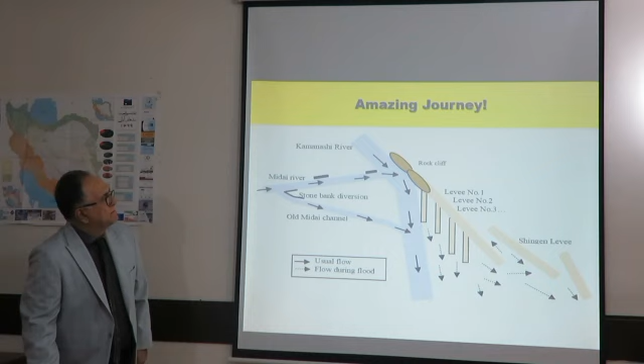hydraulic structures of Thailand, and water management in Malaysia, and Japan, still Japan, and this is Kafara Dam, 4,600 years old in Egypt, aqueduct in Italy, Cavour Canal in Italy on 4 rivers, water management in Bali, and it was really an amazing journey.

I should like to present the 17 papers. This is the first chapter on sustainable development and water resources from Dr. Bagheri and his lecturer from Sweden on general concept of water resources sustainability.

Then we have a paper on sustainability of Chinese civilization and water conservation. Engineer Charles Abernethy has prepared magnificent papers on roles of management in sustainability of irrigation system. And we have another chapter on history of irrigation in Thailand and its sustainability.

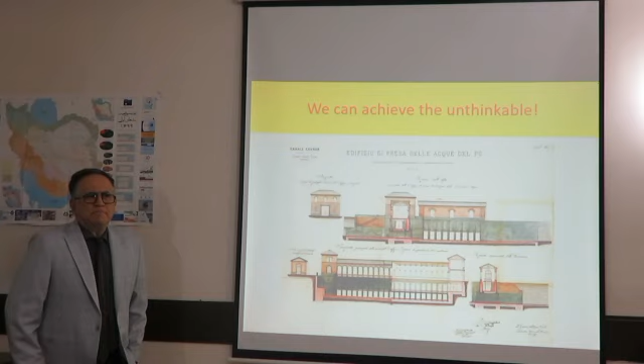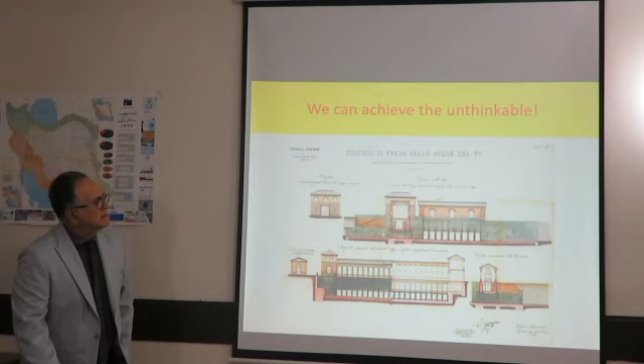And another reason is that we can achieve the unthinkable. This is the Cavour Canal in Italy. As I mentioned, an 83-kilometer long canal with 100 bridges and 200 siphons and 60 flumes, and it was constructed in 3 years, 160 years ago.

This is the Kurit Dam in Iran. It was constructed 650 years ago, and it was the highest dam in the world for more than 500 years. And they achieved this. It is located at the edge of a desert in Iran. And it is another masterpiece of water engineering in Iran.

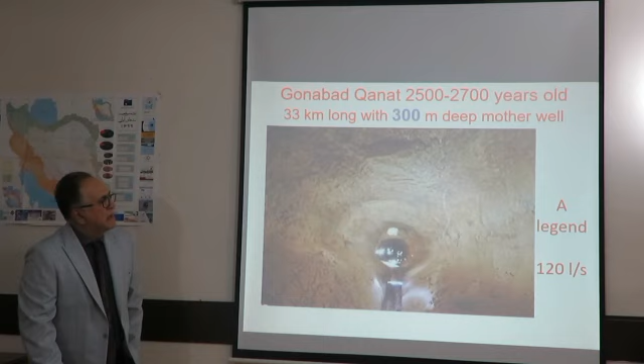It is Gonabad qanat, 2,500 to 2,700 years old. It is 33 kilometers long, and the mother well is 300 meters deep. And still it is working. It's a legend among the Iranian qanats. Okay, we can achieve the unthinkable, but it takes vision, collective action, audacity, fortitude, and adapting to the local conditions.

Another point is, I mentioned government, people, and engineers are pillars of sustainability. And the time steps of politicians are rather short compared to the time steps of engineers. But the public can help achieve the synergy, a combination of water engineers and politicians.

In the 1848 Constitution, the kings of the Netherlands were forbidden from interfering in the technical aspects of projects. I think it was a very important step in achieving sustainability in many projects. I mentioned Kurit Dam, and they constructed a new dam just upstream of the old dam, and it is empty. It was motivated by political agendas, and sometimes large capitals of government can be an opportunity or threat for sustainability of water projects.

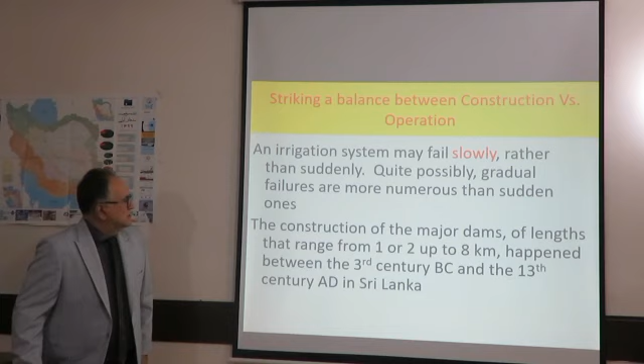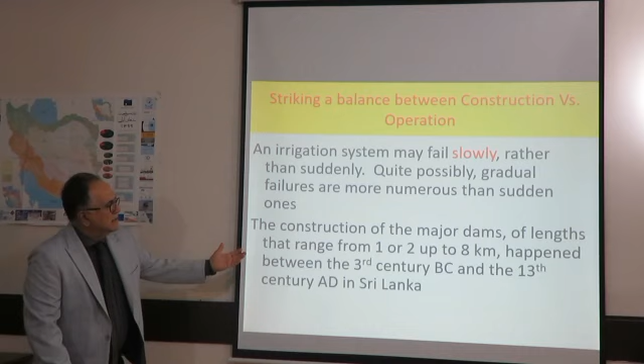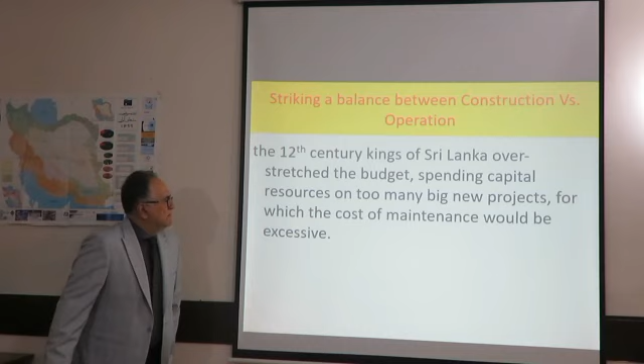And from engineering ability, we have seen that construction of major dams 1 to 8 kilometers long happened in Sri Lanka, but they invested a lot in construction, but they didn't invest enough money in operation, and the dam failed. As I mentioned, the 12th century kings of Sri Lanka overstretched the budget, spending capital resources on too many big new projects for which the cost of maintenance would be excessive. And it is a common mistake in water engineering.

And as I mentioned, we have intergenerational responsibility and equity. The present generation should give the next generation adaptable design. And then the next generation should use, update, monitor, redesign, learn while doing, and have good management, so we can achieve equity between generations. To be adaptive, monitoring is the key. These are some irrigation systems in China, and there have been numerous changes of the inlet for some 800 years.

Then we have 4 levels of management. Any irrigation system is sustained by good management. It needs proper performance of setup, process, governance, organization, operation, and maintenance. And the importance of transparency in maintaining this irrigation and water system is very high.

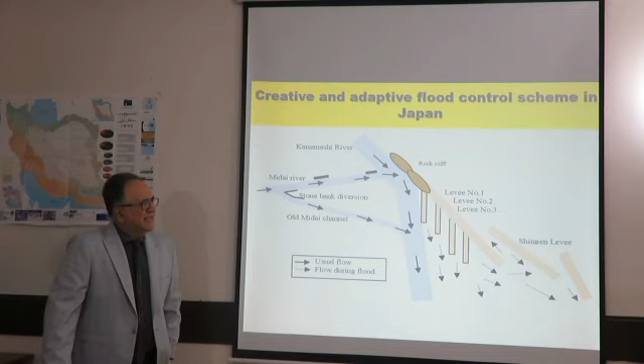And as I mentioned, creativity is a must when dealing with very different adverse conditions. In China and in Iran, we have differences of regional topographies, climate conditions, and water resources. And these are the driving forces for innovation and creativity. This is a very unique flood control system in Japan, and the samurai chief exempted a few communities from taxes and brought them here. Their responsibility is maintaining these dikes, and these dikes are still operating and well maintained to this day.

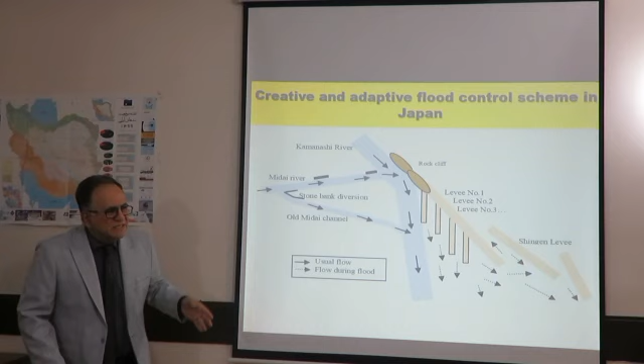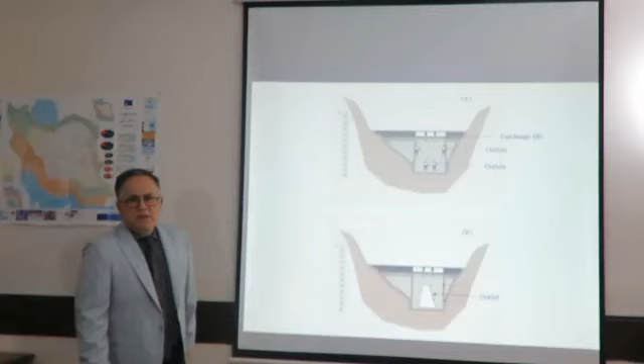And these are creative methods for construction of dams in Iran. In a narrow canyon, first they construct a brick arch and then construct the dam on the arch, with the river flowing under the arch. So there was no need for diversion tunnels. In this way they could construct many dams, and it is a detention dam that has been copied in a dam in Japan to strike a balance between flood control objectives and environmental objectives.

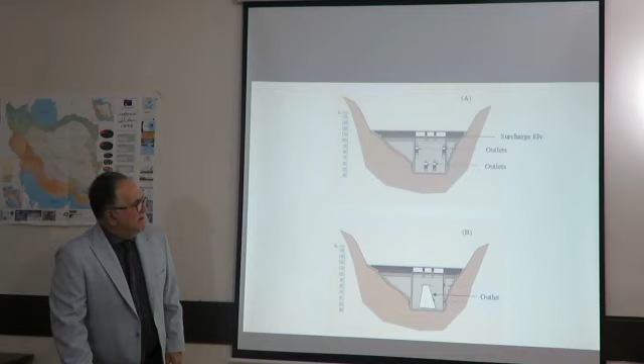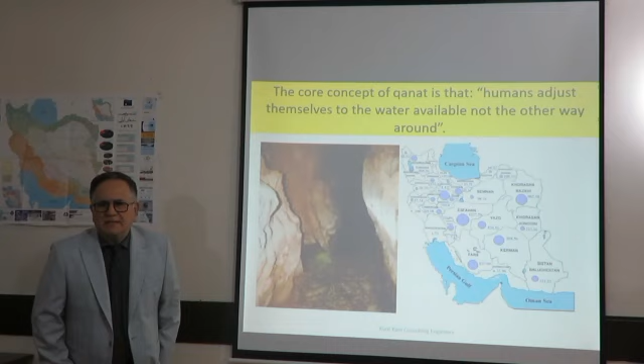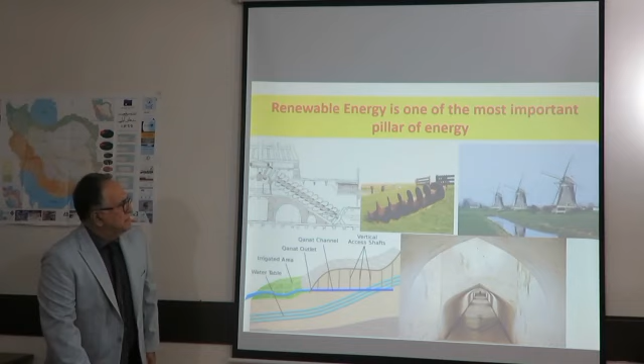And another point we have learned from Iranian qanats is humans should adjust themselves to the water available and not the other way around. And we still have a lot of qanats operating in Iran. And many cases in many countries indicate that renewable energy is one of the most important pillars of sustainability: Netherlands, Iran, many other countries. Another point is rules and regulations. Starting from Hammurabi's code, rules and regulations, even if not perfect, have played a key role in ensuring sustainability.

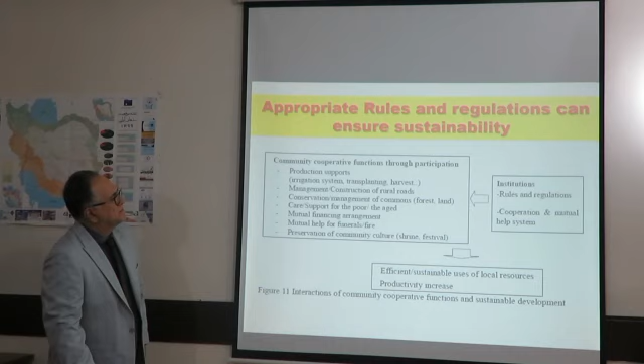Another important point is the importance of technology transfer, and it is interesting to note that in Japan, the priests defined a mission for themselves to transfer new technology in water and agriculture, because they thought their main function was easing the suffering of humankind. And another point is non-structural aspects. In order to use and manage water properly, not only hardware facilities, but also appropriate software in terms of people's groups and organization, including regimes and rules, is equally essential.